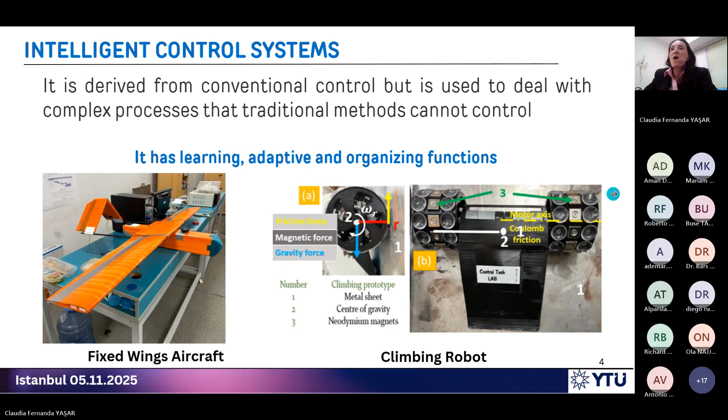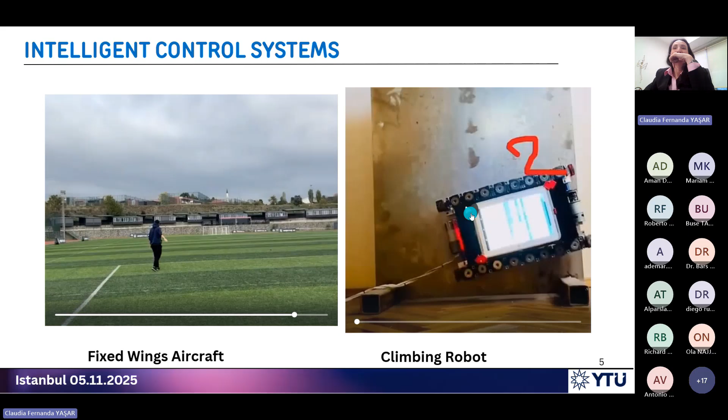This is how our plane works when there is wind, with some bounce there. And this is how another climbing robot of ours works. Here we have magnetic tracks. It's also a differential robot. It has two motors, and it has to go to a specific coordinate. This one here, if you see, we were trying to put IoT in there.

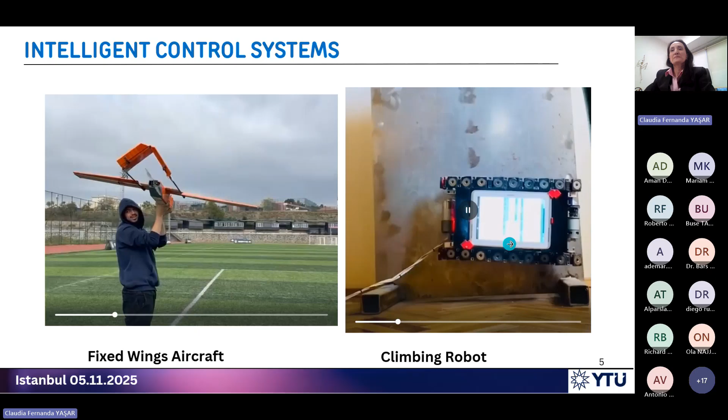So, intelligent control systems. I have been working on a project developing curriculum, and the first lesson in intelligent control is working with computational thinking tools. Here I give my students some general information about control principles, tools and techniques, trying to make the classroom more homogeneous, because they are master's students. They come from different disciplines, different engineering fields. Some come from abroad, some from different universities here in Turkey. So I don't know how much they have practiced, simulated, or done experiments.

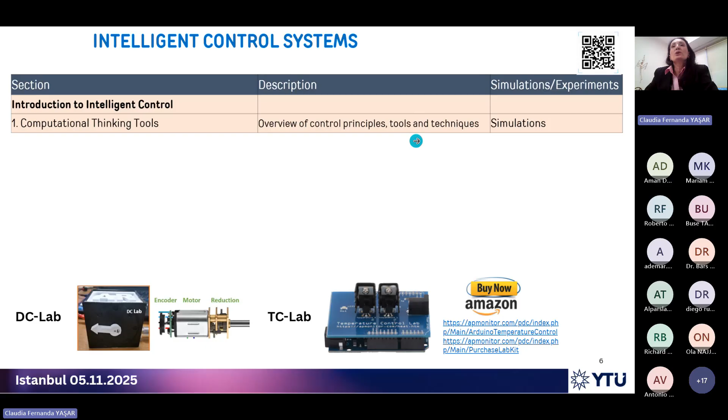So I give a lot of examples, tools, and different sources for them to learn. This is the first week. Another part of my course concentrates on dynamical systems modeling and simulation. Specifically here, we work most of the course with something I call DC lab. What is the DC lab? It's just a DC motor with an incremental encoder and a reduction box. How many things can we do with this in the classroom? It's unlimited.

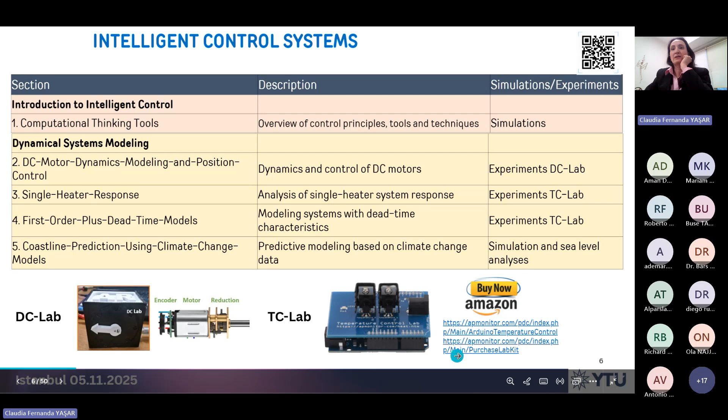We packed it with cheap hardware for our students, so everybody can have a set. I also use the TC lab, which I bought from Amazon. This is not mine; you can get information from APMonitor. You can buy it, and there are many resources. So I am also using this device for intelligent control experiments. First, I need a model, I need dynamics, because in many cases I go for hybrid controllers: model-based plus an adaptation law, and also data-driven, and then we mix them.

Importantly, have a look at the 5th week. We can also work with data that is online. I have coastline prediction using climate change models, working with regression models for predictive modeling. There is already a lot of information about environmental variables related to the sea, and some web pages project until 2050 how the sea level is going to change around the world. So I use that to do prediction and compare with the data on the internet.

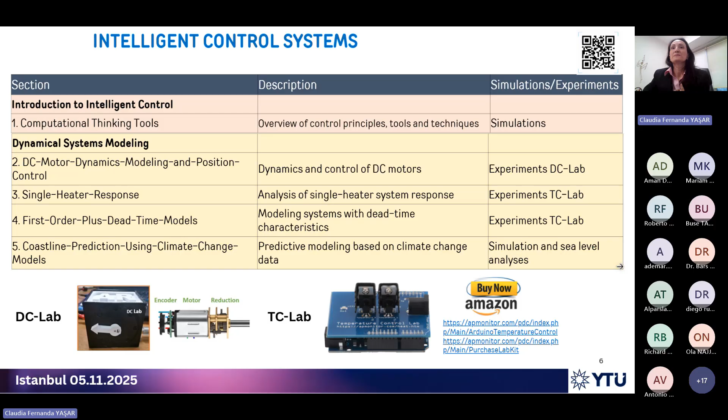Then after this module, I go to data-driven modeling: semi-empirical model estimation and regression with the TC lab. The TC lab is 2 heaters with 2 sensors. We can work with it as multi-input, 2 inputs, 2 outputs, and with heat exchange as disturbances. We can do many experiments. So I do regression and classification, I give the data, and they can run their models and test which one is better.

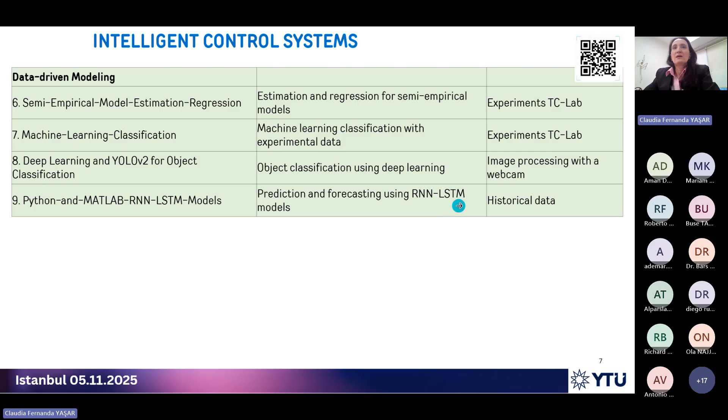In the 8th week, I use a webcam and image processing, and I do object classification using deep learning. In week 9, I use Python and MATLAB together, a very good example of interoperability. We get the advantages of Python and Google Colab in the ecosystem, and bring it to MATLAB for visualization and other things. Historical data from the internet.

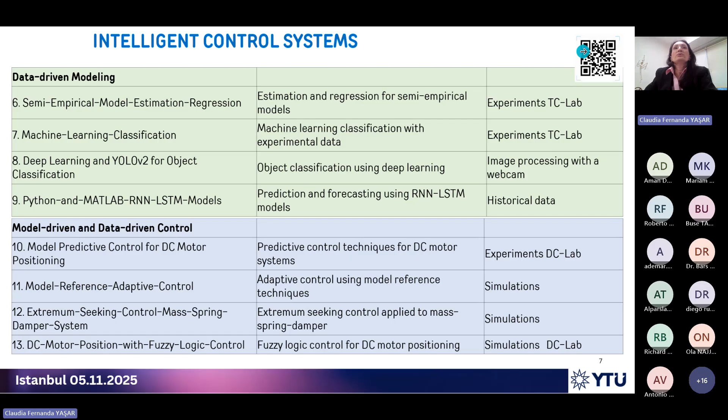Finally, week 10: model-driven and data-driven control. I have my motor, and with the DC lab I do model predictive control. I work on model reference adaptive control in simulations, and now I also have experiments with model reference adaptive control, extremum seeking, and DC motor position. This is still a simulation; we are going to apply the experiment soon. So these are 13 live scripts, 13 subjects shared online. If you want to have a look, here I have the code. You can download each week separately, and it comes with a lot of data.

Educational challenge and my strategy. So I'm sharing every week one or two live scripts, with a lot of information and programs, and definitely I have to be in the classroom at least 3 hours every week, teaching them, running the program with them.

And it's throughout 3-hour sessions, covering intelligent control concepts, control theory, giving examples, using the computational tools. Very important, control performance evaluation. And comparing a clever controller, intelligent control, with classical, so we can see if it's really better, and under which criteria. I'm sharing that interactive live script with extra activities like lab exercises.

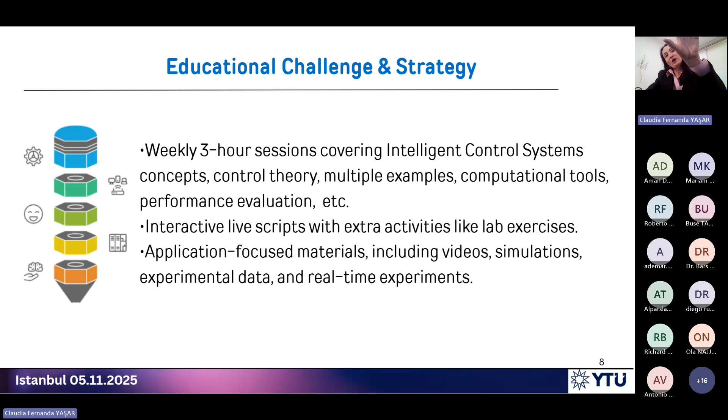The live scripts are application-focused materials. They also have videos, simulations, experimental data to work with, and real-time experiments. You can even plug in the device, and I have the software there to start working with it. Computational thinking tools, there are many. I will show you a very important one here, the live editor.

Interactive programming and documentation. I give projects to my students and they have to deliver them in the last weeks and present them, but they have to write as well. So the idea is they have to prepare their own documents as a live script. I also give them the programs in there, step by step. We can run them, everything pops up, the results. So they learn to work in this way.

It creates an interactive narrative, like a report, like a book. And you can publish the reports. You can ask your students to give it as a PDF, as a Word document, and you can also use LaTeX in it. This is an example of a live script. Titles, subtitles, you can paste pictures.

For example, you can link it to a web page that is showing you stories about the particular subject you are working on. Then you can start with your models. This is a mass-spring-damper system. You can go to the tutorial and learn more about how to model these things, like the controllers, etc. I have the models, a state space model and a transfer function.

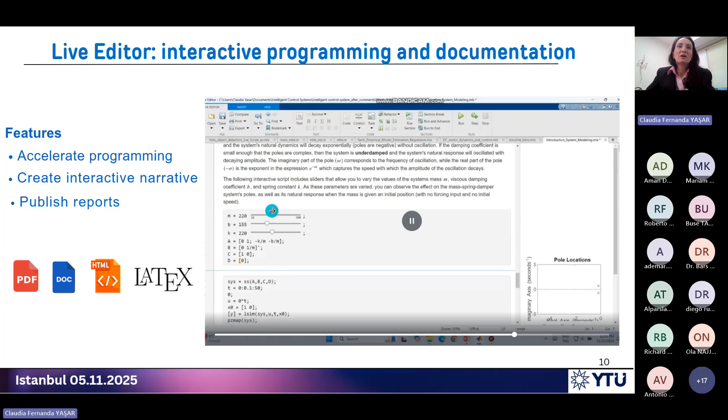I can have a look, for example, if I change the parameters, mass or the viscous friction coefficient or the spring constant, what is the pole location of that transfer function? Or I can check, for example, the response to a step. So that's the way I'm asking my students to work, to program, and to explain everything.

These live scripts, many of them come with videos. I give data in the live script, and at least they can see how the experiment is performed. So I have to create this. These are the things I have for the live script. Or I am running an image processing and classification algorithm, and I show how it works on a real robot. So there are many things here, but they have to do with the live script.

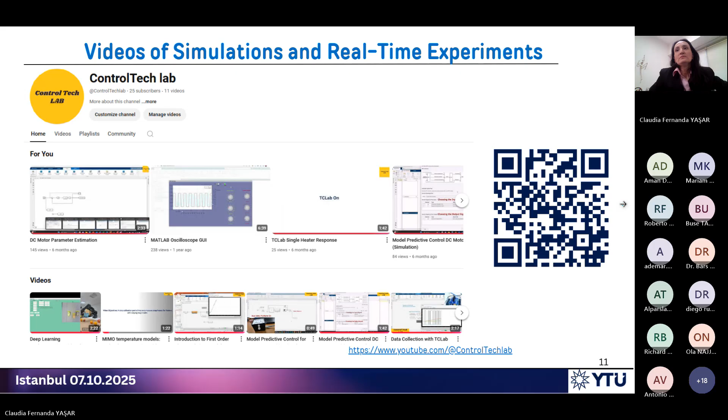Important for me, starting with measurements and sensors and how to work with them for control. So we have to speak about the basics and be a little bit picky about measurement. As it says, one can control only what is measured. Without a good measurement, you cannot do a very precise controller. So I will show you some examples of applications with my students.

Integration of accelerometer and GPS data for motion analysis using mobile devices. The advantage of having mobile phones: our students, many of them, have an accelerometer. We also have accelerometer, magnetometer, and GPS. What can we do with it? We can download a program. We can record our steps, and then the students can get that data and do some analysis. Count the steps they did and check which of these peaks or maximums might be a step. Report the number of steps.

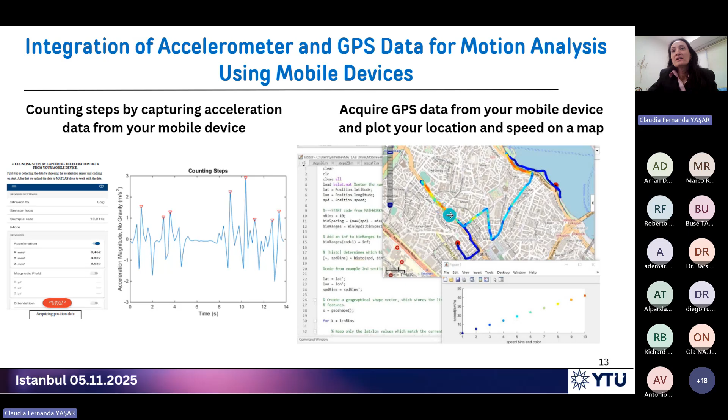Oh, you have a GPS. You can download the program and show on a map where you have been. And even with the GPS and this information, you can report speed as well. Have a look, the dark blue ones, it is speed in kilometers per hour. So these were very slow, and the red and orange parts are where they were running. So this is one of the ways to work with my students.

Another example, I have multiple examples. A very good one I like very much is this one. What is very typical, you work with Arduino Uno. We have developed a new, at least lab-made, optical sensor with a diode, an emitter and a receiver, and we make an array. And with the reflection of light, we can check the force. And then we can calibrate it.

If we have a very well calibrated load cell, we can check and make it close, and use them. If it is calibrated, the optical sensor can be used for gripping, for haptics, to give the system the sense of touch. You can make it clever in many ways by using touch. Have a look, this is an STM card.

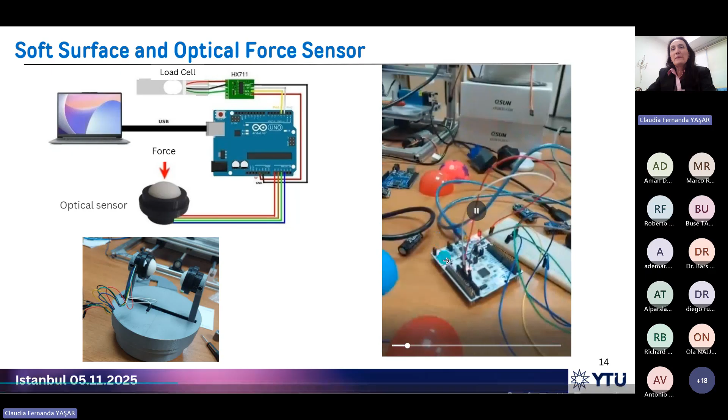This is very basic. It was the beginning, just to see. There are some diodes inside receivers, and you can see how it changes. So now the idea is how to use this experiment to measure force. Then we were working on different sensors.

We were molding them, and we were applying force to each of the sensors. On the opposite side, we have millivolts. Then we were applying a step, which means some grams here in the x-axis in this graph. We are increasing, and at the output side, we have millivolts. So step by step, we were changing, going up, increasing grams, and then we are going down.

And if we repeat it, we obtain this kind of hysteresis graphs. Then I said to my student, let's calculate hysteresis by gram. And we came up with this calibration table where we can report per each gram what is the error in hysteresis. It was kind of linear. We could see it from the very beginning, but then when we increase step by step, we could see the hysteresis.

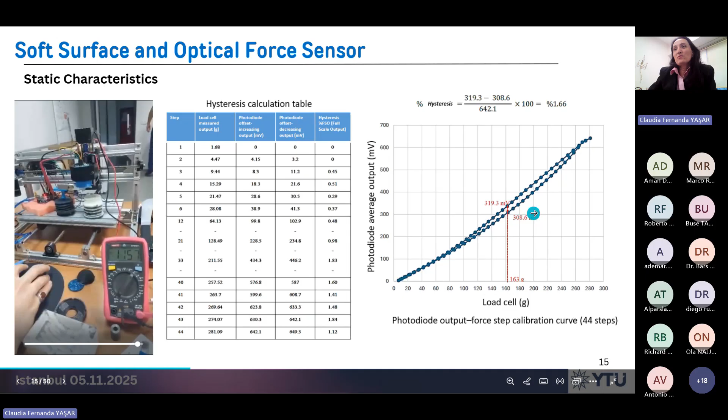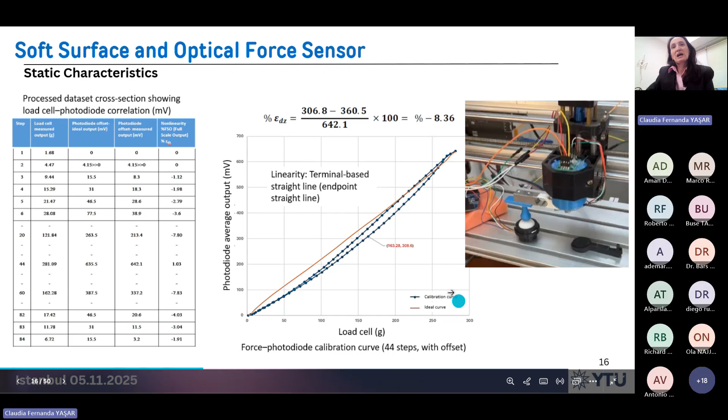Then we say, I wish it were linear, fully linear. Let's have a look and report non-linearity. And it is given in percentage. And in the same way, step by step, we increase it. Here we have the hysteresis, and we name this red line the terminal-based straight line, also called endpoint straight line. So it's a calibration curve. It can be used to make the system clever with some haptics.

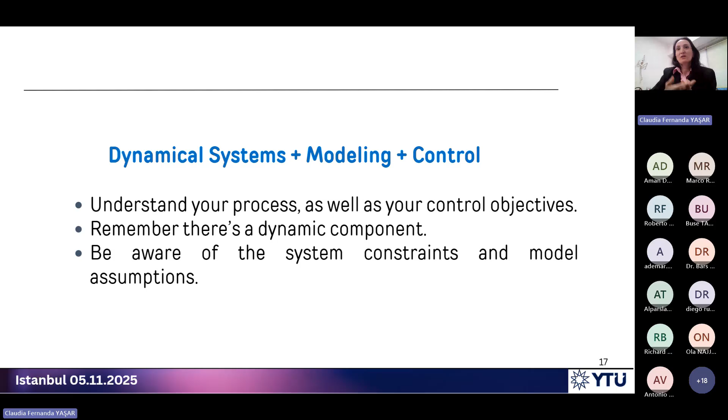Now, I'm going to explain some examples in dynamical system modeling and control. I speak to my students about how important it is to understand all about the process inside and outside, and define your control objectives in a logical way. Remember that there is a dynamic component. What does it mean? At least try to obtain a reduced model of the dynamics inside the system. And be aware that there are some constraints, limitations, and be aware which assumptions you make for that specific model before doing control. That is important.

Right now, I have a work in intelligent control, the DC motor dynamics modeling and position control. So we have the motor with an incremental encoder with the reduction box. We put an Arduino Uno, and we are learning some theory, dynamics and some classical controllers. Then we can simulate them. Then we can try with the little lab, the DC lab. Does it match? The simulation has to follow the real experiment.

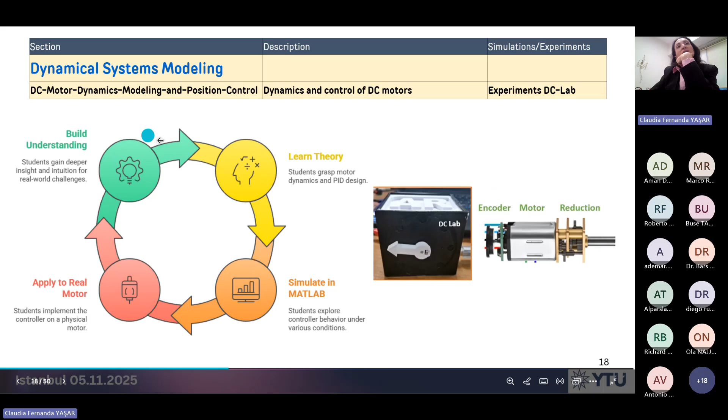If it doesn't match, it's because your simulation is too ideal. You have to make it realistic. So add friction, add saturation, be aware what else is affecting the system, but it has to be similar. Then we build some understanding of everything that is happening in that experiment, insight and intuition for real world challenges. Then we can come to the theory. If this one doesn't work, we have to start running on this side. This is an experiment with this DC lab.

Normally, I work with a reduced DC motor model, only the mechanics. And here I have the torques coming from friction that are nonlinear. I say to my students, if we come up with a controller that can compensate for this friction, we have a linear model, and we can use Laplace. If we are going to control position, theta divided by the input, that is voltage, then we have a reduced model, a second order system. We are going to control position.

Finally, we have parameters K, J, V: motor constant, motor inertia, viscous friction coefficient. We can group them. We have a model, and we have to identify only two parameters, A and B. We can use a parameter identification toolbox that will tell us these values, A and B. Let's have a look how I am doing. This is my live script that I'm sharing with my students. Some information about how it works, table of contents. I'm explaining what is in there, defining variables and parameters, models, the transfer function, state space representation.

If you have the device, I mean, if you have a DC motor with an Arduino and you can plug it in, I am giving the software. You get the data, you save the data. Or if you don't have the experimental platform, I am giving the data. You click a video, you see how I got this data.

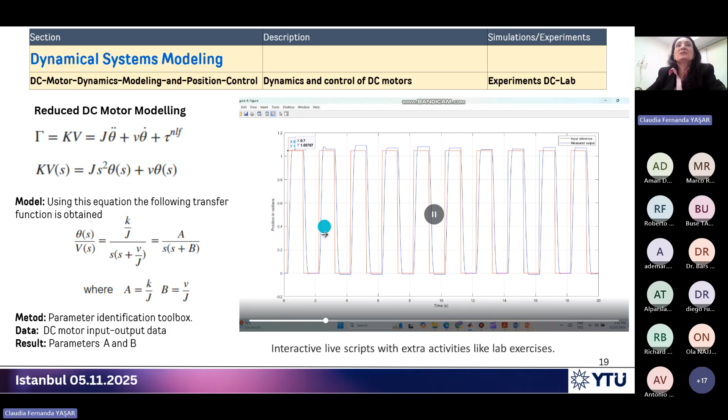Have a look. The input to the system is in red and the output is in blue. This is coming from a position controller, a P controller, a very basic controller: I do some steps in position that are going to change, and then I go feedback, P control, this is the motor, and I obtain the output. So have a look that the input in red and the output in blue is kind of similar. It's not exactly, because it's just P control. It's not enough, but at least it's going to allow me to do a good parameter identification in closed loop.

I am going to share this thing. Where was it? Here is how I work with the parameter estimation toolbox. I upload the data that I share with my students. Then there are some optimization functions. The toolbox is trying to follow the experimental data that I give, and it's going to tell me what is the value of A and what is the value of B, the best value to match this graph. Experimental cost going down because it's iterating, and A and B are changing.

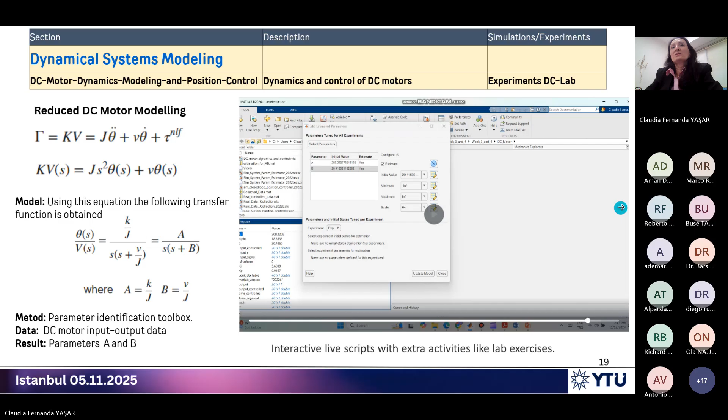Look at A, that is the blue; the initial value was very far, so it's approaching. After some iterations, we are going to have A and B. To accelerate this. It says estimation converged, and we have the values A and B reported here: A 206 and B 20.4. So now we have the model, a reduced model, and we have some parameters. Now we are ready to do some control.

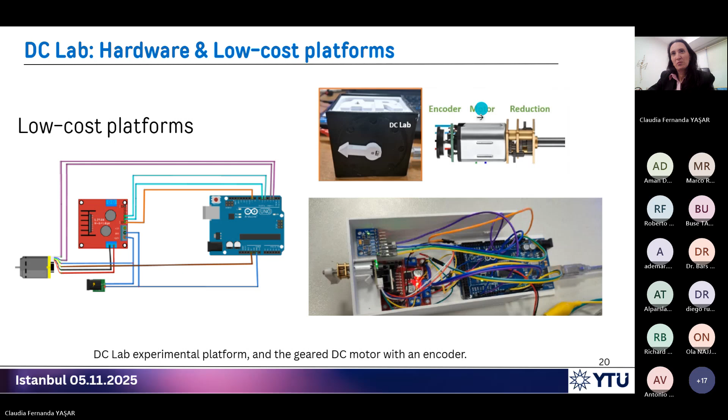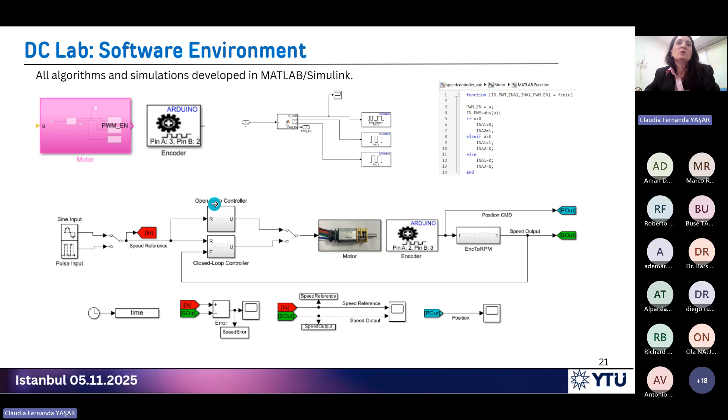These are lab hardware low-cost platforms, Arduino and H-Bridge. This is the motor driver. Motor with encoder and reduction, and we pack everything. We put an indicator. What do we need as software? We need to generate PWM, set the input in voltage, the duty cycle. And we need to read the encoder. But because it's a motor, we need to go forward and backwards. And then we are going to have here a function. If we can generate PWM and read the encoder, we can close the loop. This is the motor, the encoder. We can do open loop, closed loop, and test many controllers with our students.

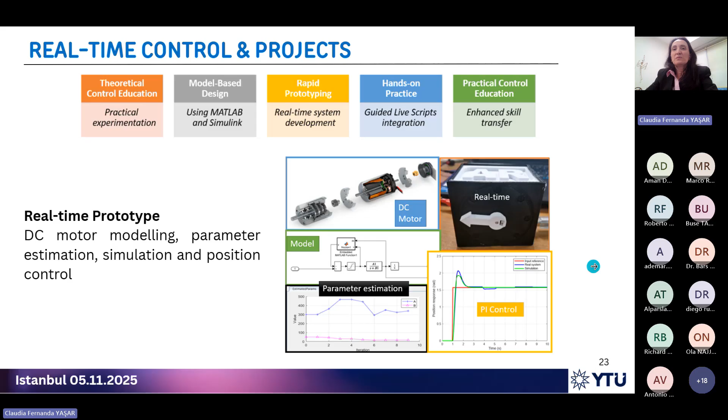Of course, this encoder gives a count every 30 degrees. The resolution is very low. Anyway, we can make it better with a better acquisition system. And here I have Arduino Uno and a better encoder. But anyway, it is pretty similar.

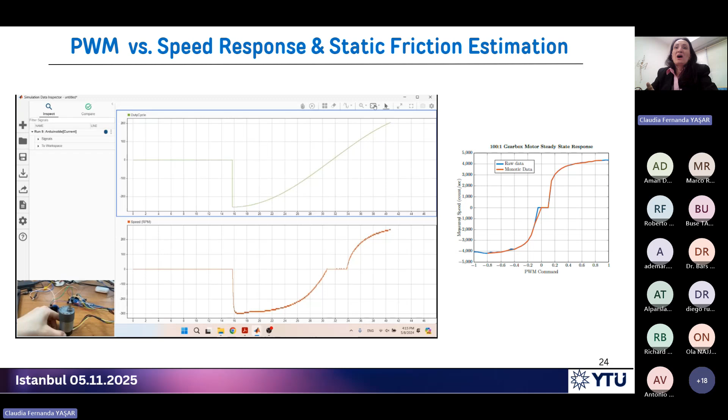Another important thing is to analyze how the system responds to inputs and check for at least the static friction. And we can generate a 1D table, very easy. We have the motor. We have to increase from 0 and give PWM. Here I have forward, it's going to turn until 100% PWM, or negative, the other way. And we can record for each command what was the speed. We get it with the encoder. Increase PWM. Have a look at the speed.

There is a part here that it doesn't move. This is the static friction. Keep it in mind because you should know that there is a non-linearity there, so don't ask the controller to work in that area. As well, you have identified what is the saturation, the maximum speed. Don't tell the controller to work at these maximum speeds because there are non-linearities in here.

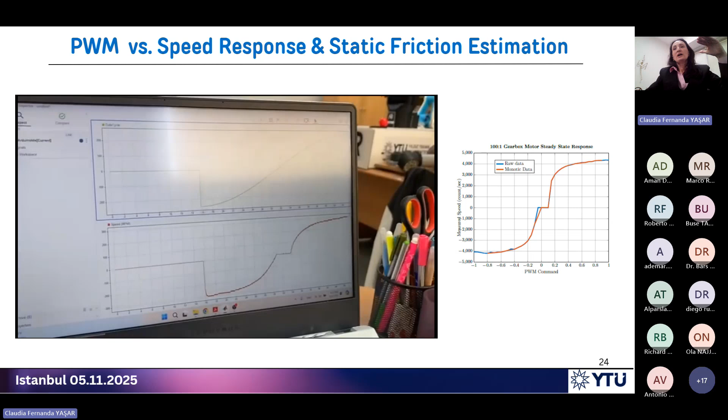So try to work. Here there is a large non-linearity, but we can use this part anyway, for example for a speed controller in open loop. If you know that given this command you are going to have this speed, you can use this data, save this data, and say: do you want this speed? So go and give this PWM command. As my students are doing, open loop.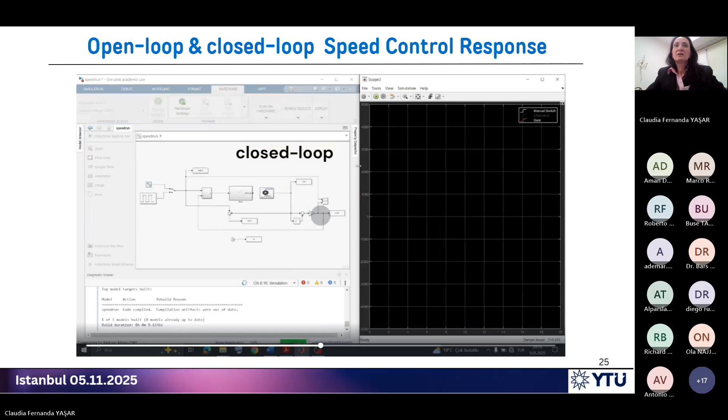Now we are going to do speed control following a sinusoidal. And this is open loop, just using that 1D table. So we have the encoder, and here we have the 1D table. Or closed loop, then you get the encoder, get the feedback, put at least a P gain and check. So you are going to have a nested inner loop and then a closed loop.

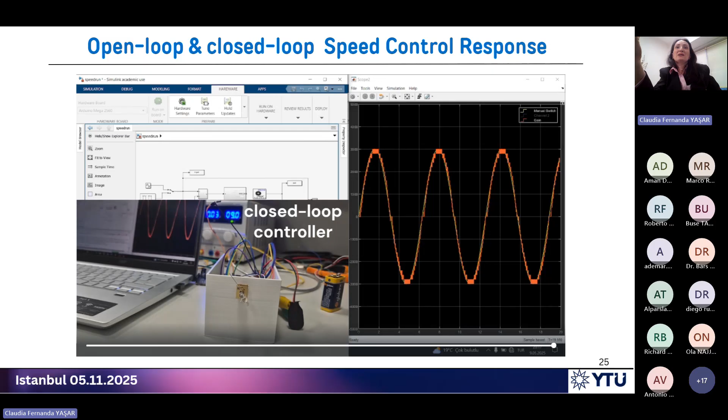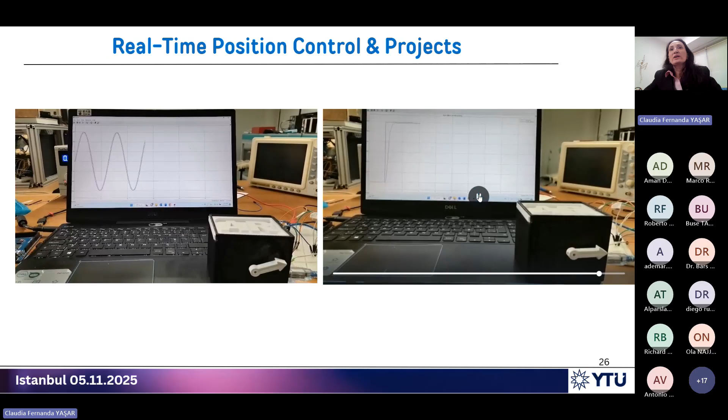This is input-output response, but I am asking for error signals and control signal. I need to be sure that you are not saturating the controllers. We can work in position control, following a sinusoidal, or here on the right, I say to my students, we are working with motor and we are working in position. I need critical damped responses.

The fastest you get the settling time, and I need almost 0 at the steady state. I don't want overshoots because it generates a behavior that is not good for robotics. It gives problems, it gives vibrations. Then I will look for critical damped responses.

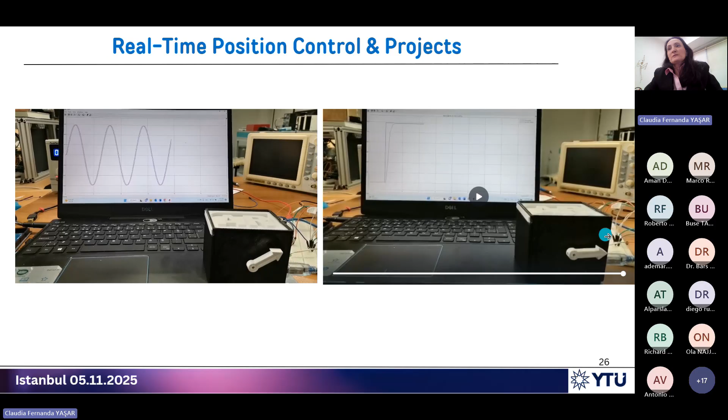Simulation and student projects. So it was 2 years ago, we modeled this motorbike. There are some similar models you can get from the internet. And the idea is, for this motorbike, we need to do cruise control, speed control here for the rear wheel, and also control the balance. So you can have the system with a closed loop speed controller, and check how the system is going to perform in simulation.

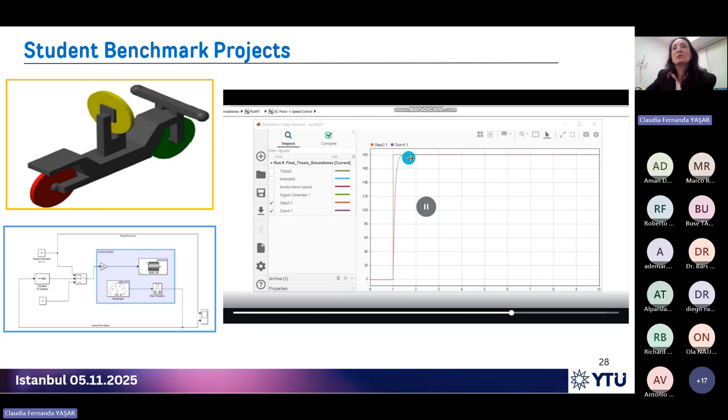This is Simscape, the motorbike, the mechanics. I'm closing the loops, realistic loops with motors, with friction. If you click here, you go to simulation. Have a look at our motor here, our model. The blue one is without control. I will come back here. And the green one is when the motorbike is balanced. And this is the speed controller, rear wheel speed controller. So you can run the simulation.

Once you have that, you can tell your students to try to experiment with a realistic platform. It was done in the course of real-time control. Here I am balancing the motorbike just with mechanics. There is no control. There is just the gyroscopic effect. The motor is full power, full PWM, and it allows me to balance the motorbike mechanically.

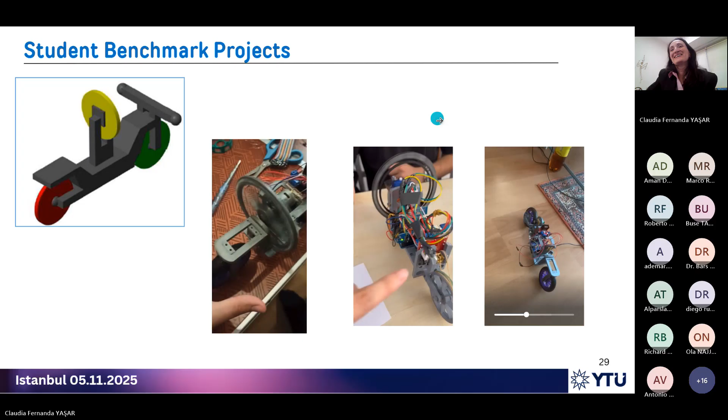Or you are a control engineer, so put a sensor and do a closed loop controller in position. Keep it steady. Also, here we have a speed control. Testing a speed control. This motorbike can go reverse as well. Forward and reverse. It's the first motorbike that I see that goes in that way.

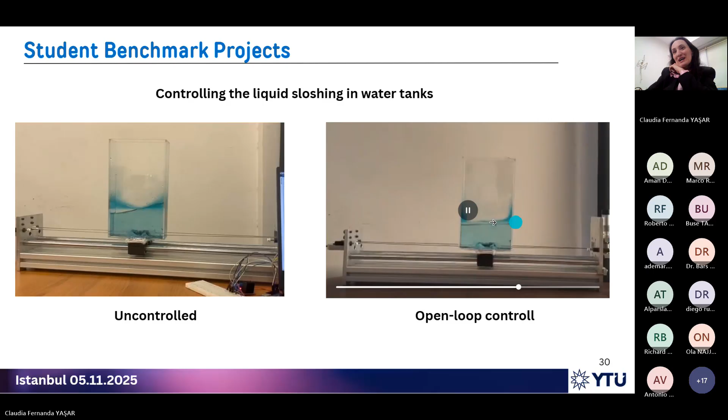What can we do with motors, controlling DC motors? Many things. This is an example of process control. We are controlling the liquid sloshing in water tanks. This is a problem of transporting liquids. The one uncontrolled has only control of the DC motor in here. And now the one that is coming with an open loop controller. I can get the dynamics of the sloshing effect and invert the dynamics, and I get a reduction in that sloshing effect.

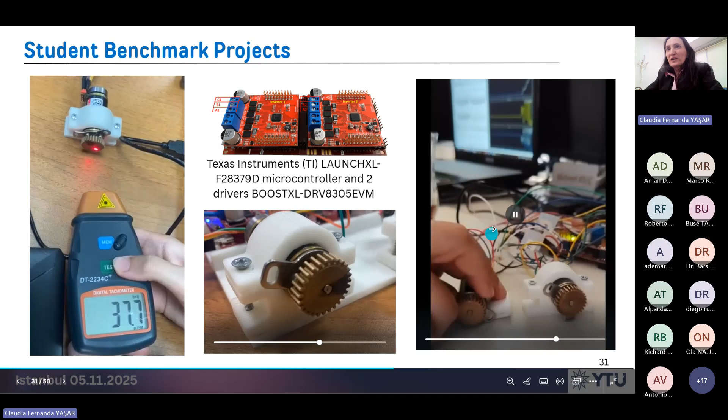We go and work also with brushless DC motors, speed control. This is Texas Instruments, cards and drivers. We also can go with brushless DC motors with control. These are force control and inertia control. Switch off this. Okay. So we are moving one, and it is feeling it and reproducing the same movement in here. I say to my students to do it, checking the control signal.

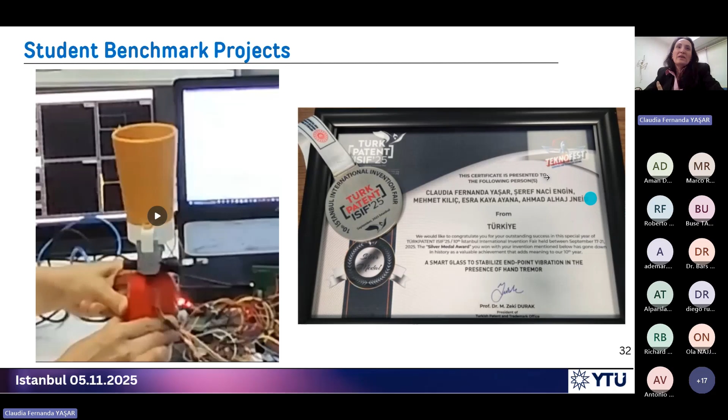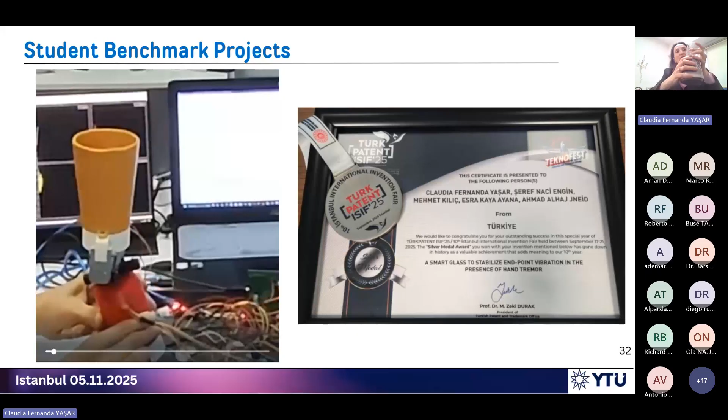What else can we do with motors? Have a look at this experiment of ours. With my student, I said, we can do a kind of glass for people who have tremors, like people with Parkinson's, or we also can have tremors later on. Then being able to drink water while the hand is shaking, so endpoint control.

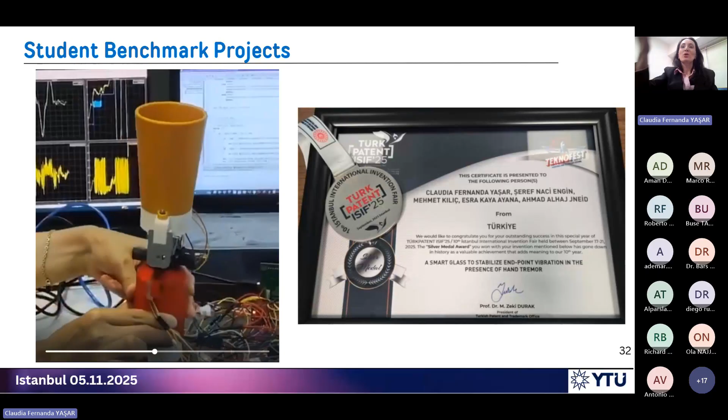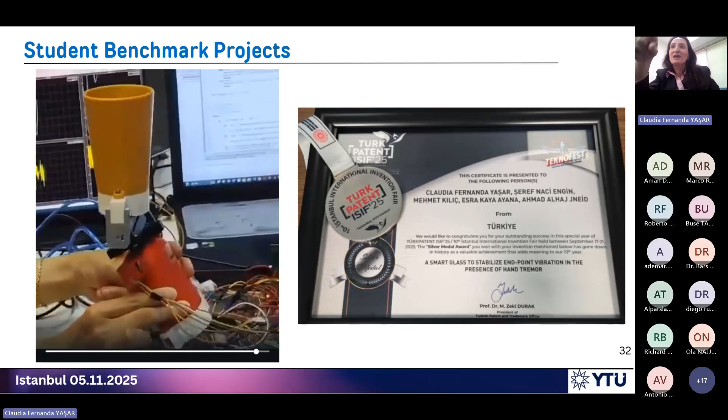We checked on the internet and we found the spoon, and it was patented. So I said, we didn't see the glass. So we tried to patent this work in Turkey, and it was patented. And also we tried international, and we passed the technical report. And in Turkey, we got a medal, the silver medal, one of the best patents, with this glass. What do we need? Controlling two motors, and there are some accelerometers in here.

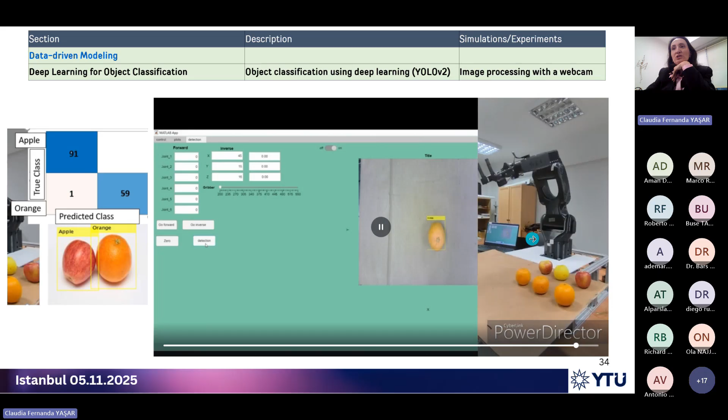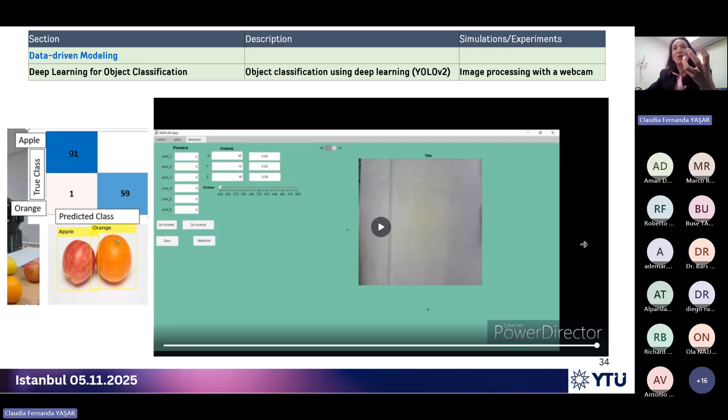This application was done in MATLAB. All the deep learning algorithms for classification were done in MATLAB. The robot was built in my lab; all the mechanics were printed there. Even the gearboxes, helicoidal gearboxes, were developed there. Is this a control with the stepper motors? Yes, because they are cheap, and then we put an encoder, and like that, we came up with

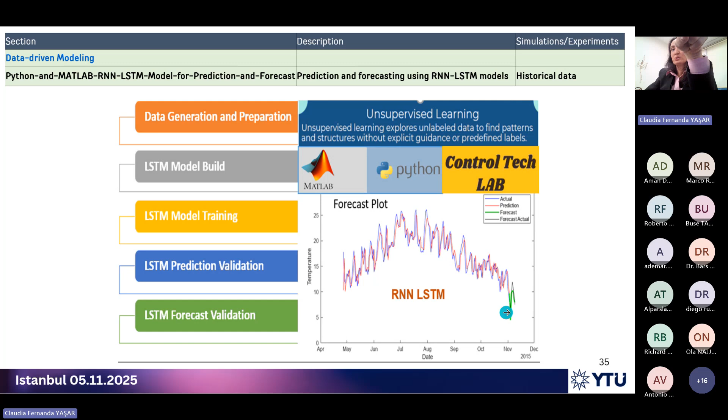And after preparing the data, we build the model. We did some tests, and we optimized the hyperparameters. We did the training, testing, validation. We do prediction, and then we do forecasting. Here we can see from May to November 2015, actual data in blue, prediction data in red, so it is following, forecasting the future in green with the model, and the actual values of forecasting here in black. So this is how it works.

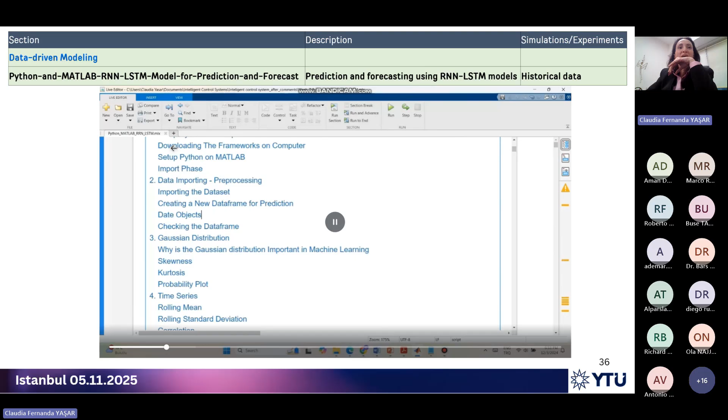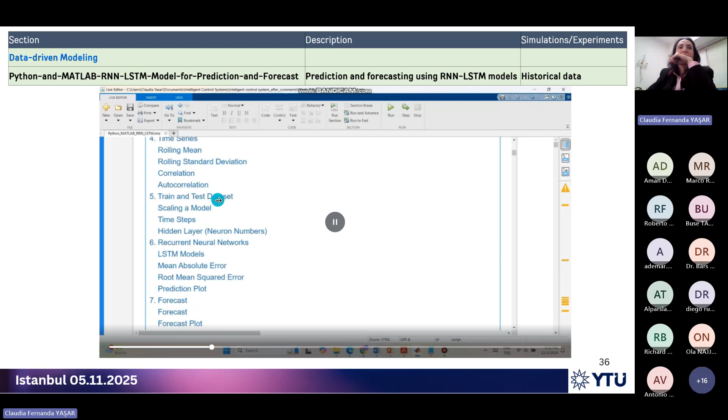We have a live script that teaches you how to install everything in Python to work with MATLAB, all the libraries, importing the data, doing some tests, Gaussian distribution, kurtosis, probability plots. We go to time series. We are working with time series, so correlation, autocorrelation, training, testing, validation. We use recurrent neural networks, forecasting, and we have some plots.

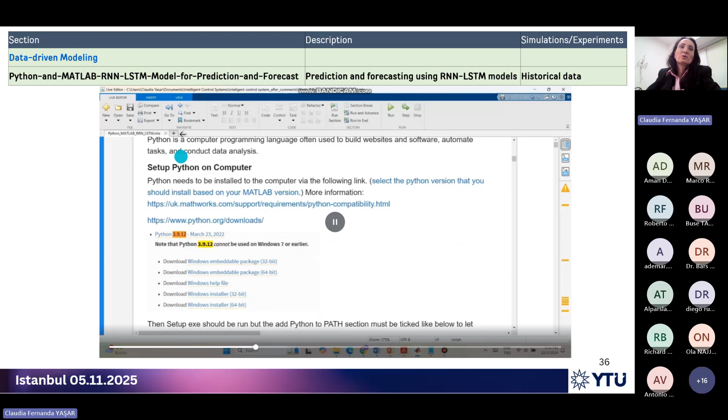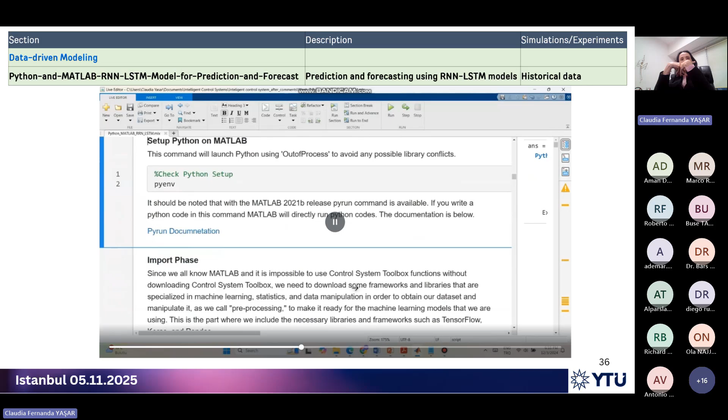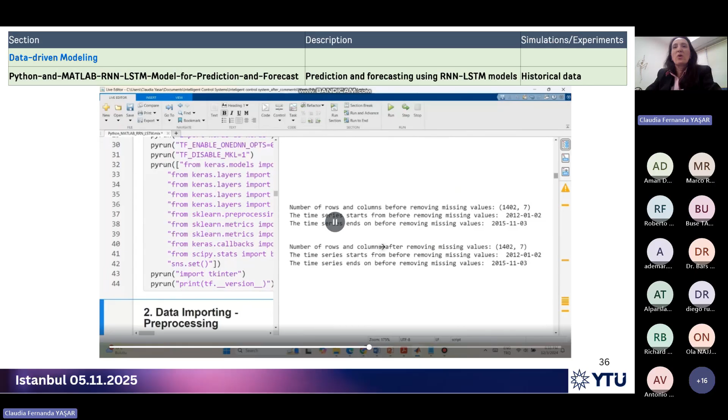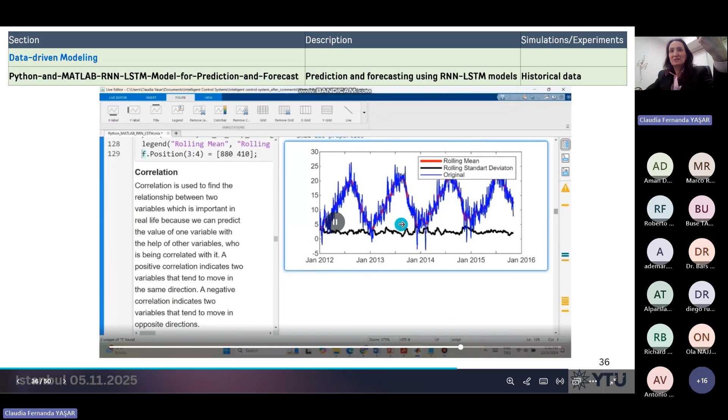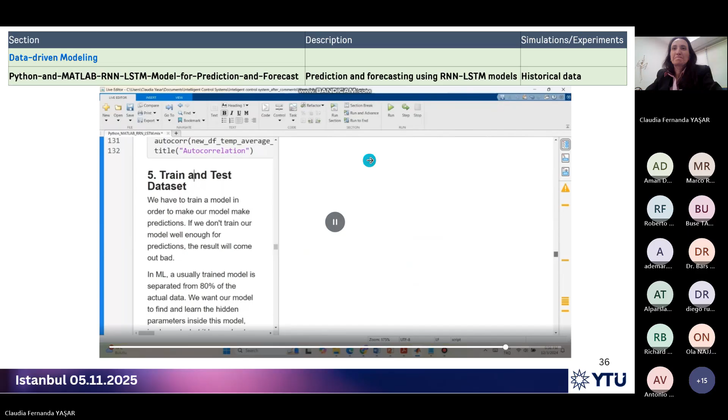This is the time series, January 2012 to January 2016, 4 years of data. We check rolling mean, rolling standard deviation, to see some trends to optimize our models. Autocorrelation: to do prediction, this should be very close to 1. Then we do the training. So this is more or less what we do in live scripts. Prediction plot, pretty similar. And then forecasting, some days ahead in November 2015.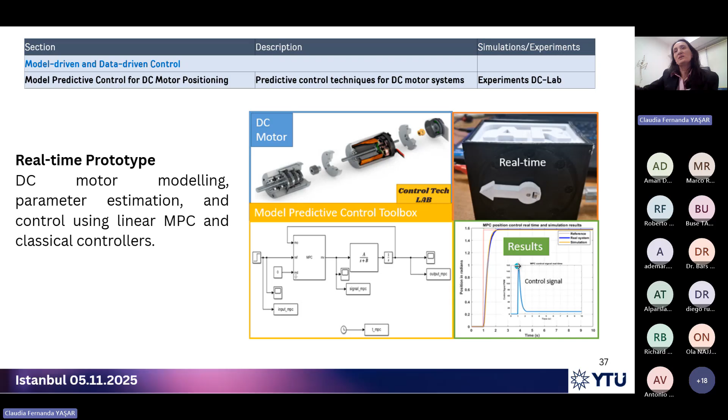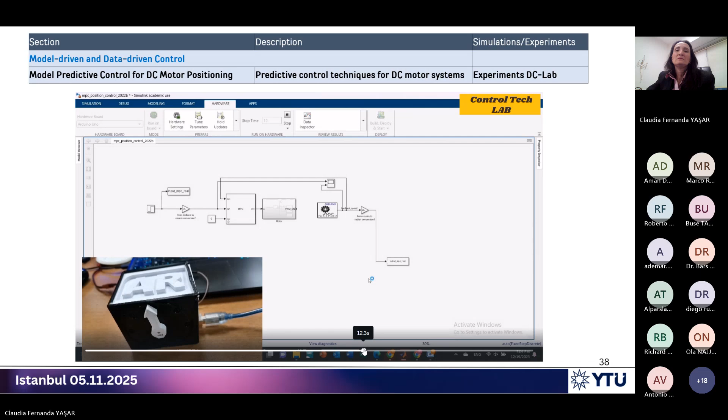Remember that you have to plot the control signal. So I try to increase the speed just before getting the overshoot in both controllers, but never pass 100%. That was the duty cycle, the PWM signal that is allowed. So I put it to the limit and see how fast the system can get and check simulation and real time. Simulation in yellow, real time in blue.

We can also do it with classical control. So here I have the MPC and the PI controller. And I say to my students, let's get the same settling time and try to work with the maximum control signal that you can give. And then we have the PI in yellow, in green, and the MPC in blue. The same settling time. There is an overshoot because it's a PI controller. And we check the control signal for the PI controller.

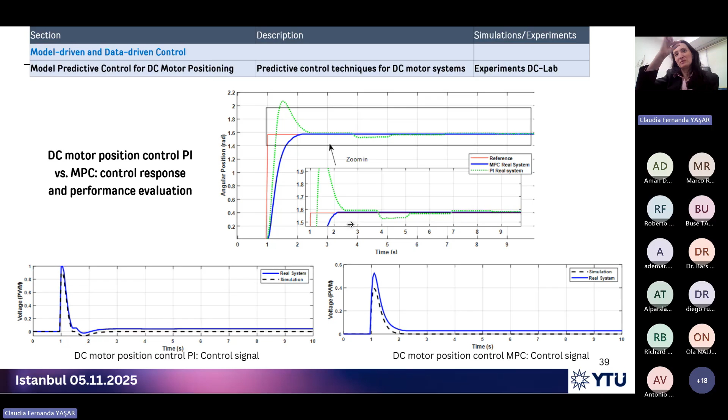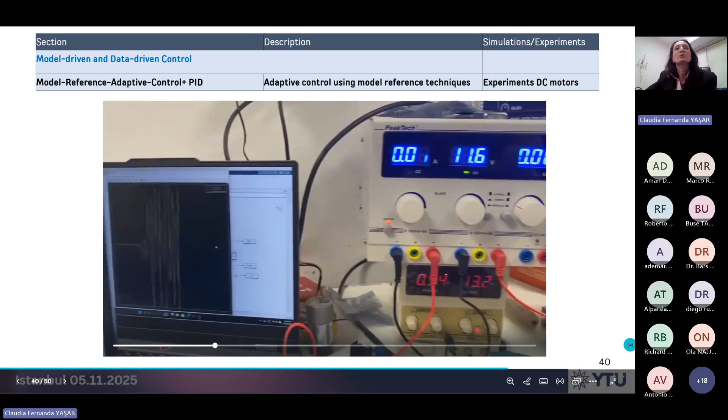I cannot go faster because I already reach the saturation. Here we have the signal for the MPC. Here I reach saturation, but here I can still go even faster. The MPC can go even faster. And it gives me a better static error. The green one was having chattering, but the blue one, there is an error in there. Maybe you cannot see it, but there is the red line and the blue line is at the top. Anyway, model reference adaptive. We design a shaking table. What do we need? Control 2 motors, following an earthquake signal.

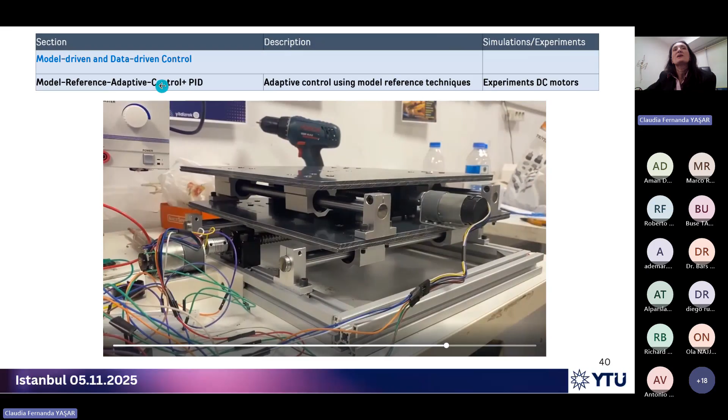Model reference adaptive plus PID control, 2 degrees of freedom. Parameters of the PID, parameters of the model reference adaptive. I said plot input-output response. Always plot the error. Always plot the control signal and make your comparisons or evaluate the performance.

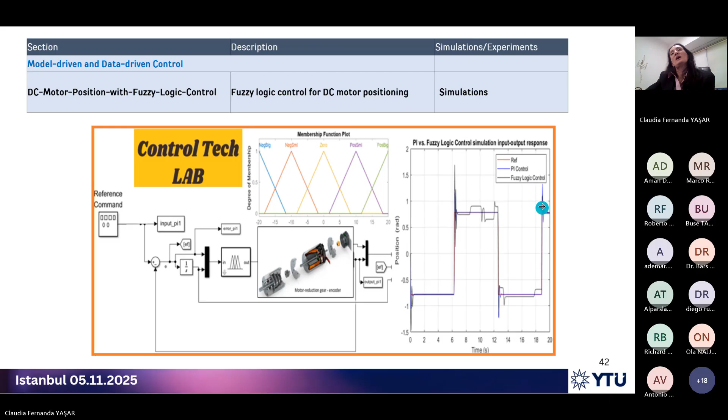We have also, in the last session, model-driven data-driven control with fuzzy logic control for a DC motor. This is still a simulation. Very intuitive, to learn how it goes and how to work the membership function plots. This response, I know that can be better. I prefer going to the experiment and coming back to the simulation and see how it works.

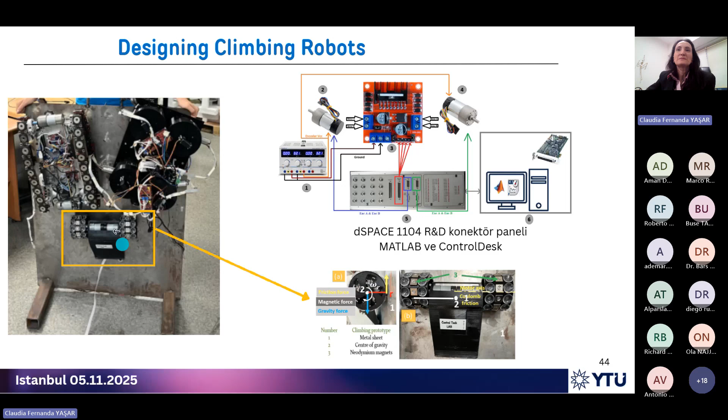Research and intelligent control. Designing climbing robots, we have been working in our department with our students. After taking this course, I have some of them in my lab. The robot that I showed you with the differential driving is here. We use a dSPACE for that. For the one with tracks, magnetic tracks, this is a very good one, climbing robot programming diagram.

The master is going to be a Raspberry Pi. We are running everything with Node-RED as a main program that manages motor drivers, path following, orientation. We can use the camera for inspection, joysticks for manual operation. All the data that we have with the camera and with the corrosion inspection, the position of the robot, all of that data can be in a web browser, and we have some sensors that we need, ultrasonic sensors and a capacitor sensor that is missing here.

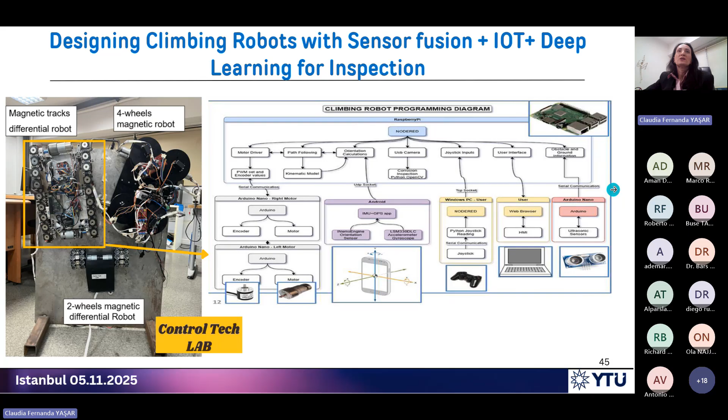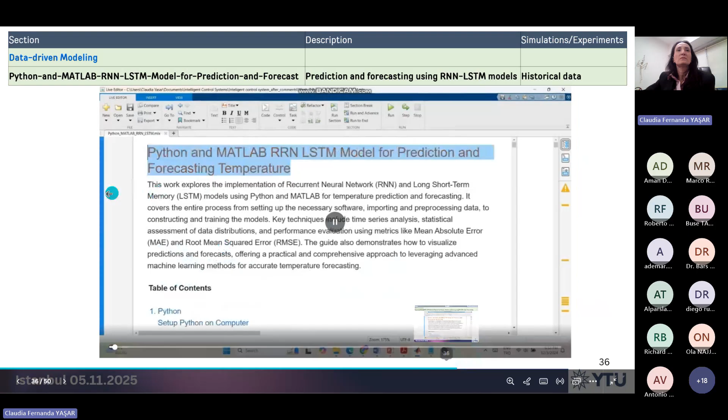Sensor fusion, IoT, and deep learning for inspection. That's how it works. The one with magnetic tracks and differential robot. We're going to go up. Oh, pardon. Why it went that far? We're just trying to. It's going to go to a specific coordinate. Start the camera. And then we can start with some deep learning algorithms for inspection.

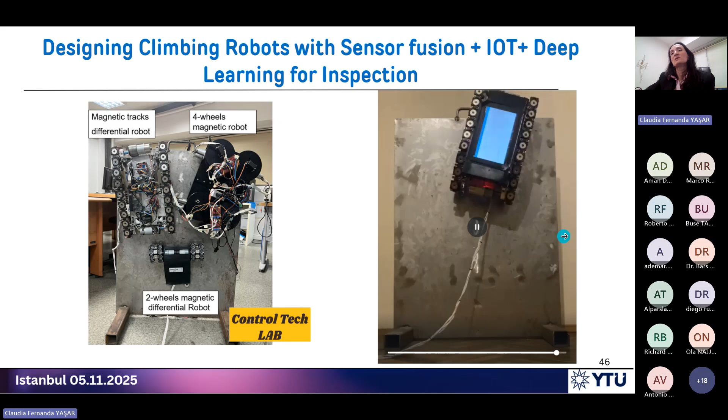We have some other, still developing this one. It's with BLDC motors, Texas Instruments cards. We are moving it in the metallic wall, but there's still a lot to do in control. But this one already has the algorithm to detect some corrosion, at least some colors, some indication that there might be a problem in there. This one, BLDC motors, and we have these magnetic wheels.

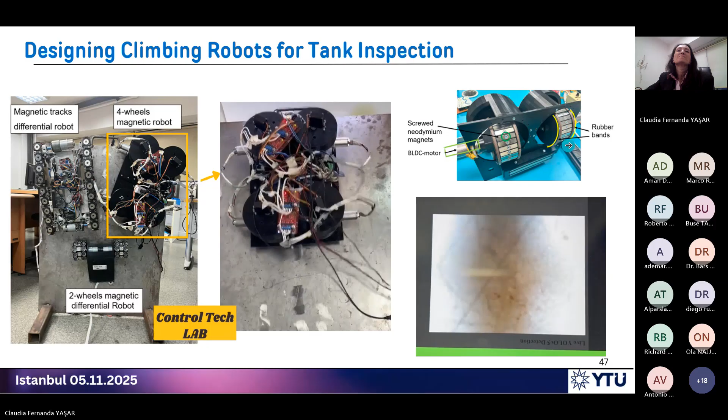Then with the climbing robot with the magnetic tracks, we published the controller, corrosion inspection, IoT integration, deep learning, and advanced control, in Multimedia Tools and Applications. And the last one was adaptive speed control of climbing robots using modified model reference adaptive controller, IEEE Transactions on Industry Applications. This one is 2025. International conferences, many. A very important one, this IEEE conference. We were selected because it was a good paper, and we published this 3rd journal in there. So we made it better. We did a lot of experiments, and we published that journal.